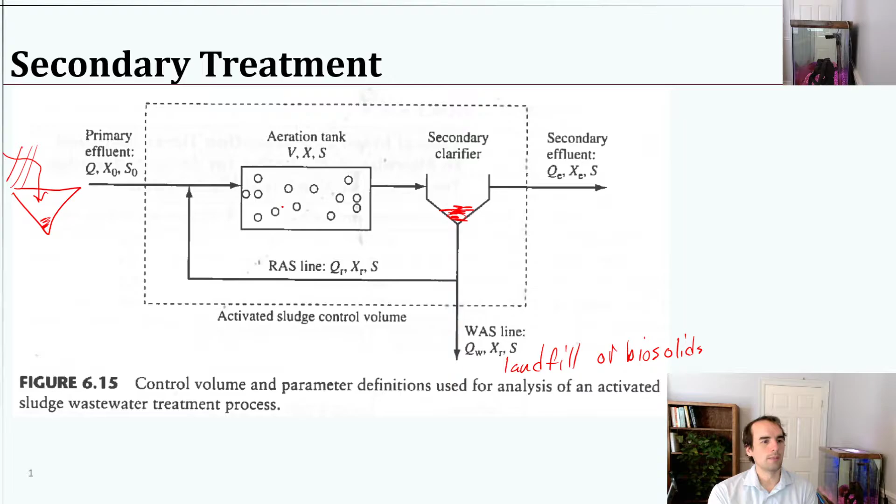So some terminology: a waste activated sludge, or WAS. This is essentially the slurry, the semi-solid stuff, just the junk. If you look into a wastewater treatment plant in one of these, it'll just look like that sludge. It's liquidy, but it's also just muddy looking consistency. It's just a slurry of microbes, the waste, and all of the bubbles that are used to aerate it.

Typically, we'll just simply use air for aeration. You could inject oxygen directly, and that would give the microbes even a bit of a better boost, but it's typically expensive, more so than it's worth to actually get pure oxygen.

So in addition to aeration, one thing that adding all of these bubbles is going to do is it's going to mix the tank. So if we think about the bubbles coming up, as they come up, they're going to be doing lots of mixing. And so when we consider this waste activated sludge system, we want to think of it as a CSTR, because we have a big tank, got lots of bubbles coming through, and it's essentially mixing the system pretty well.

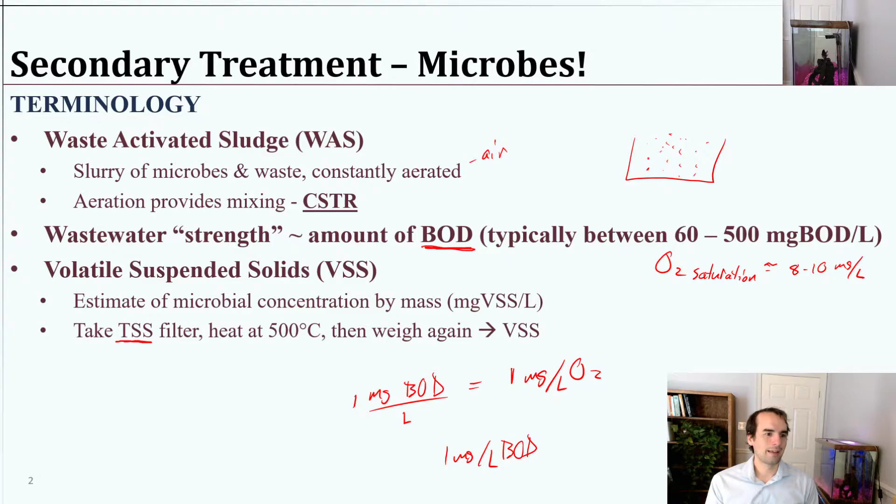That's very handy because we don't know every type of microbe that's in there, and we don't need to. We want an estimate that we can use without concern as to what type of bacteria it is. We don't want to have to hand count them, looking through a microscope or growing them on some petri dish. That has problems itself because not all microbes grow on petri dishes. So this is just a really convenient, simple way to get an estimate of how much microbes we have.

Okay, so thinking about what are the typical treatment outcomes we achieve, we very often have 95 to 98% of BOD removed. So let's take the 95%. And then a low strength wastewater with 60 milligrams per liter of BOD, we can multiply that by 0.05. So we have just 5% of that remaining. So 5% of 100 is just 5. 5% of 50 then is, excuse me, 2.5 is what I meant.

This is probably something like 2.7 or something, right? 2.7, not 0.27. And you could do the calculation for me if you wanted. It's somewhere around there, plus or minus some. Maybe it's 3. But essentially, that gave us a pretty good reduction, right? That means that if we remove 95%, we only have a little bit remaining. But if we had 500, then we're still at something like 27 milligrams per liter of BOD. I guess I might as well be thorough about this and get the calculator out. Okay, it's exactly 3.

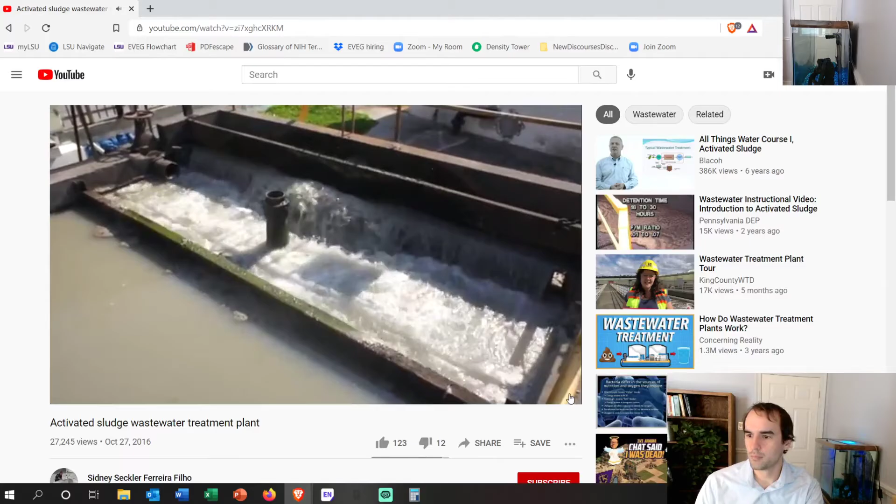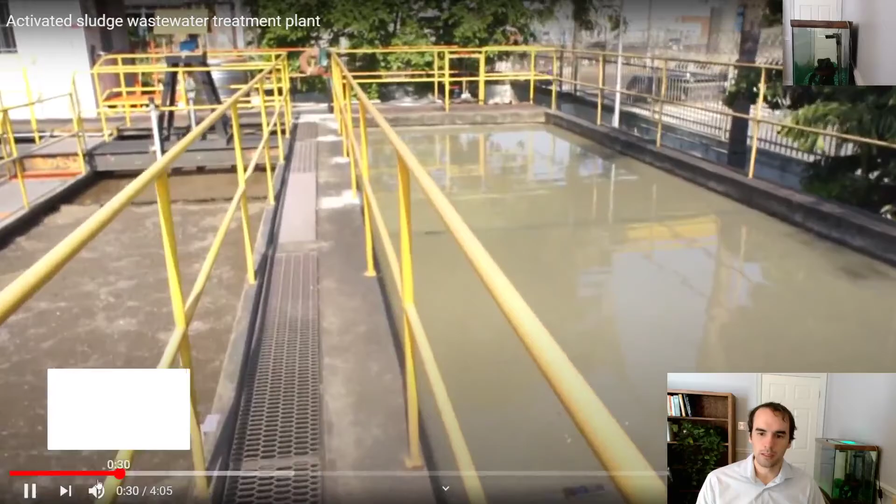So this is just a wastewater treatment plant. It looks like on the right here we've got probably sedimentation happening in a rectangular clarifier, and then on the left over here would be the activated sludge basin with all those bubbles coming out. So on the right, I think that would be either sedimentation, or maybe they're starting it off with the anaerobic process. No, that couldn't make any sense because it goes into air. So that's very likely a sedimentation basin right there.

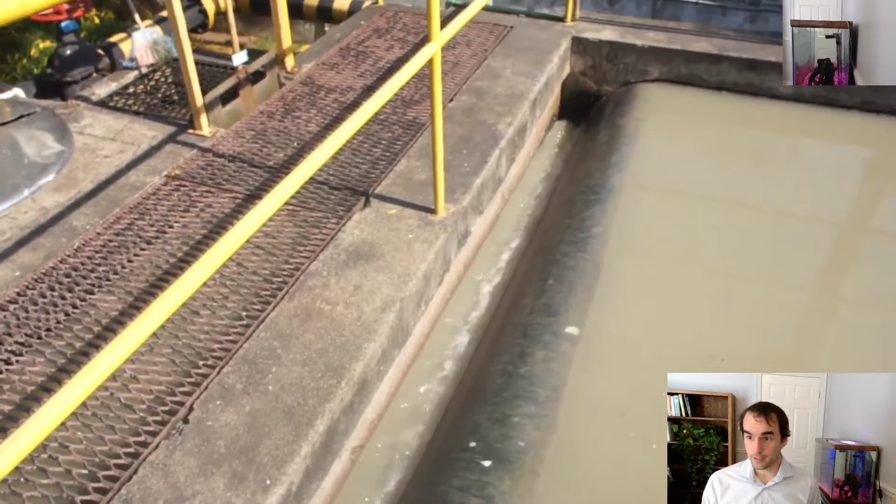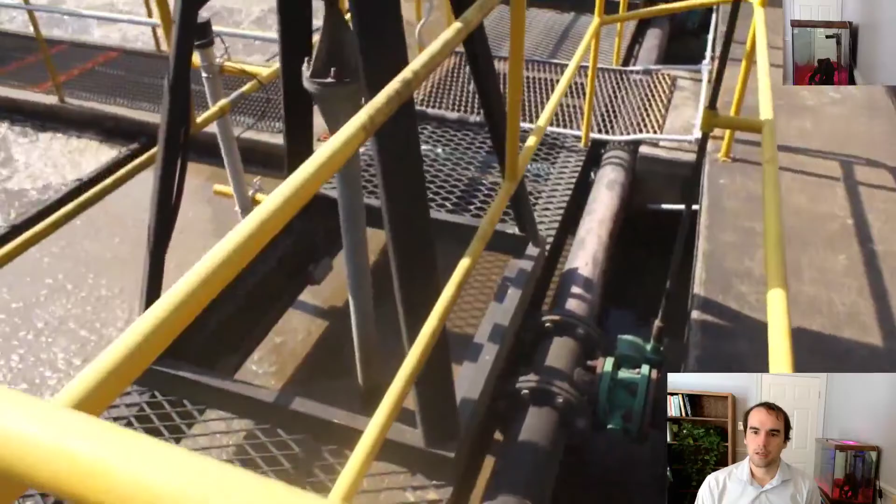It's a rectangular one. Then they're taking that water and feeding it back through the channels into this activated sludge chamber, or probably the multiple ones. And then it's slowly moving through these chambers, providing lots of air as we see. And you can kind of see the sludge-like appearance of it all.

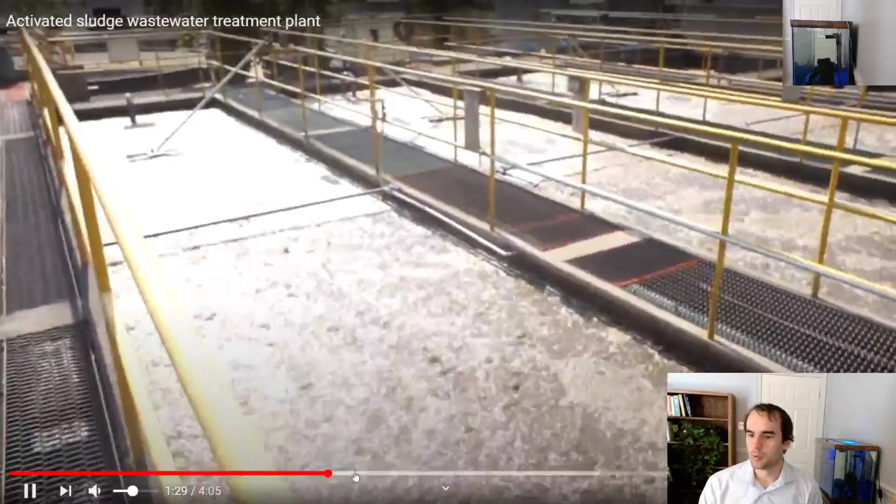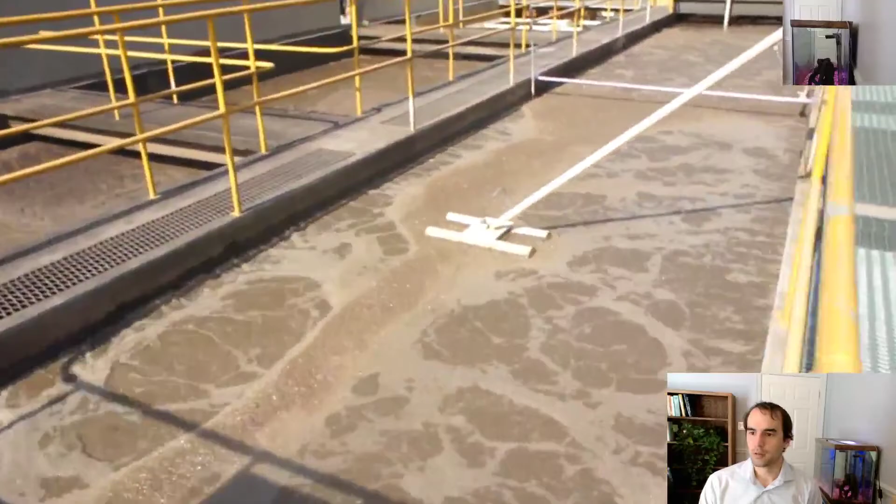So this person is just kind of walking through. Skip through a little bit. It looks kind of like the water is moving pretty quickly, but I think that's mostly the effect of the bubbles making it kind of look that way. Of course, these are going to be designed with specific retention times involved.

Now, one thing I'll note, if it was not already obvious, you really do not want to fall in there, which is why they have all these nice railings. I don't even need to say that, but you especially don't want to fall into it because all of these bubbles will mean that you have less buoyancy, which means you will sink and not be able to swim. So if you fell in there, you're going to be partially buoyant, but not buoyant enough to swim because of all the bubbles.

You're going to have to walk to the nearest ladder, and in each of these there are ladders, because it's probably pretty deep too. And then climb your way out of the wastewater system. So it's actually quite a hazard that you might not think about. So yeah, don't fall into the wastewater treatment.

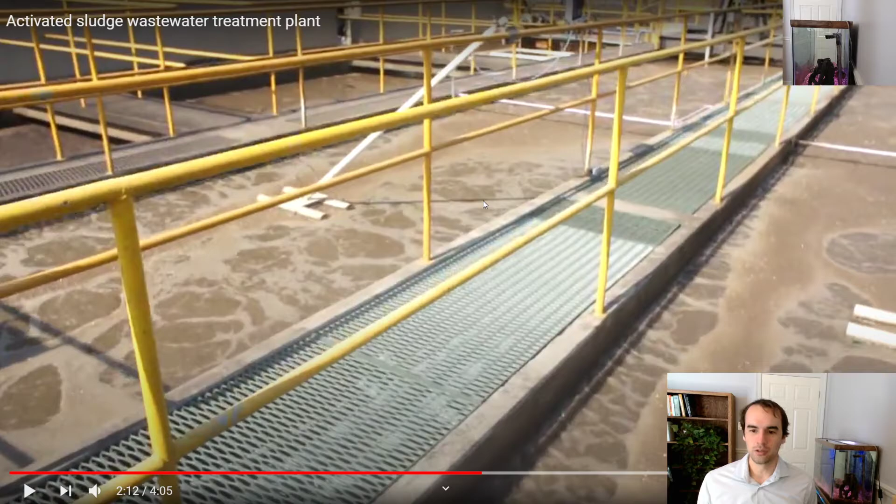That's actually also why if you ever happen to be in a situation where you're on a boat and it's capsizing and sinking, you want to get as far away from that area as you can if you're swimming, because there's going to be lots and lots of bubbles coming up from it sinking. And if you're on a ship, likewise, you want to stay away from it, because you could potentially sink a vessel or yourself have difficulty swimming, given all those bubbles creating a much less buoyant liquid where you're trying to float or swim. So that's kind of scary.

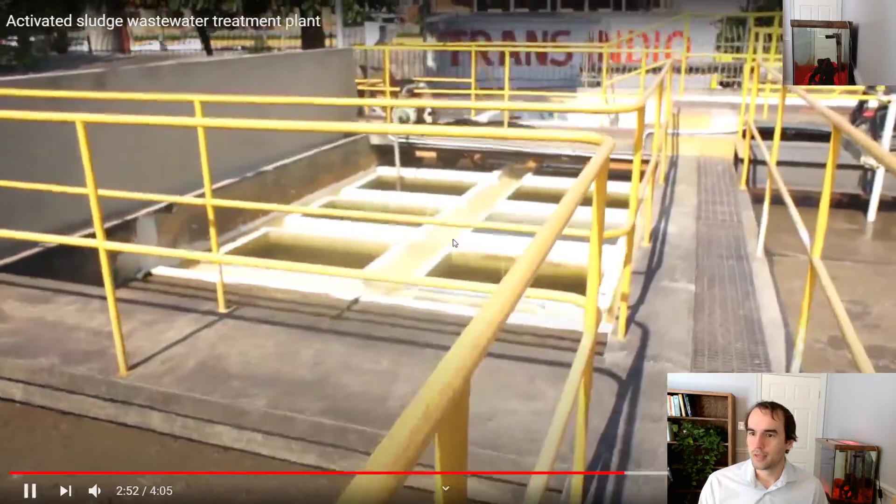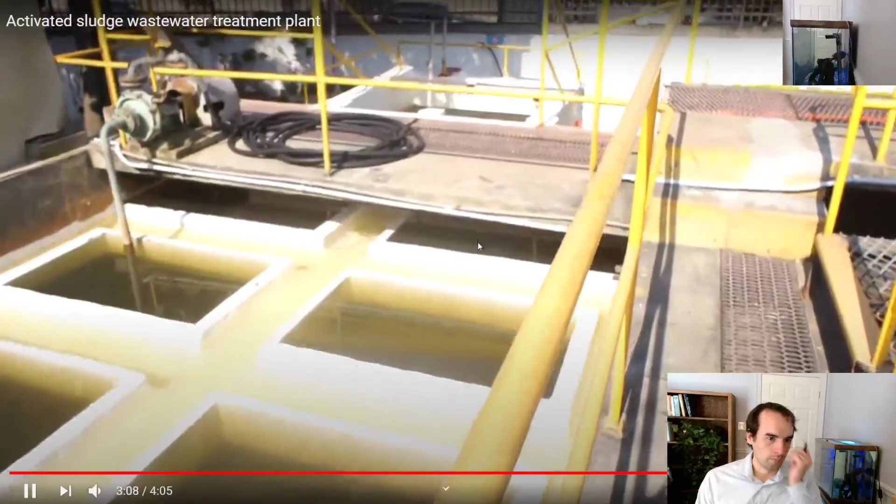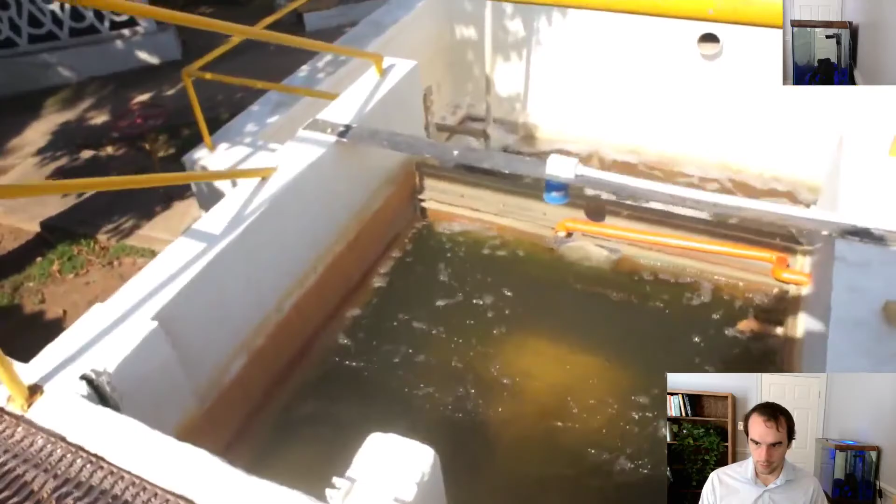So they continue walking through this, and over here we see, not sure what chambers these are. This might be some sort of disinfectant contactor chamber, although I don't think it would be that, given that it's open to the sunlight. And then their effluent coming out here. So perhaps that might be a clarifier that's mostly underground. But then you can see the water coming out. Still has a bit of color, but it certainly will be higher quality than it was a moment ago.

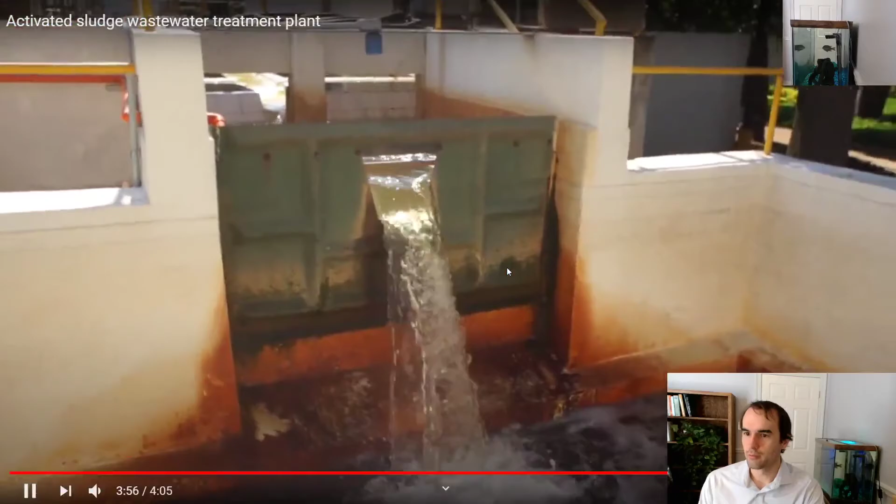All right. And I think that's about it to just show kind of what it looks like from the other side there. So yeah, that's a good depiction of activated sludge there for you. And we'll come back to our PowerPoint. Okay, so moral of the story, don't fall into the activated sludge basin.

Okay, so we want to know something about how to model, predict, understand the growth of microbes and how that relates to the amount of this waste substance we have.

And I've got a sneeze coming, and I do apologize. Maybe I'll be able to mute myself in time. Maybe. Hang on.

Okay. No sneeze yet, but might be coming.

So in terms of the growth of microbes, we can use a term to understand the growth that is called the Monod equation. And this gives us a value for this parameter here, mu. And if you look at this value, this is a rate constant. So what we're looking at here is a growth rate that we're interested in, the growth of microbes, and that is the growth rate constant.

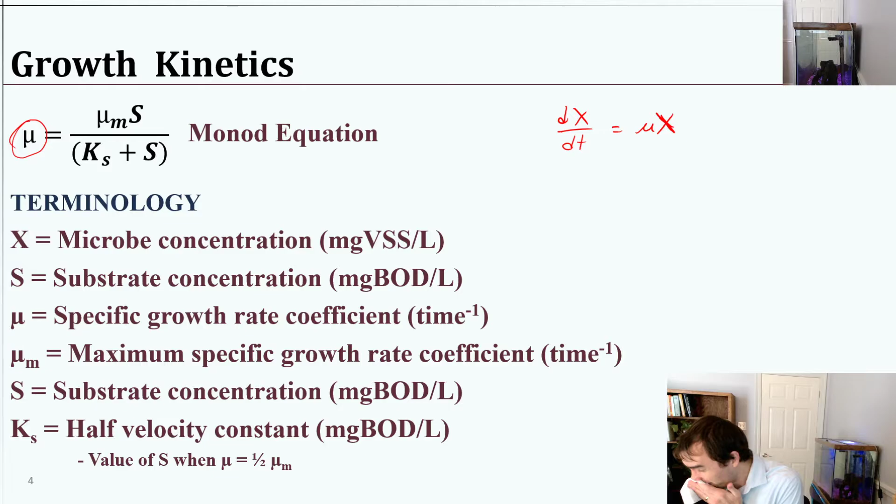Okay, sorry about that. So when we're taking a look at this growth equation, the simple form is dx/dt equals mu x. And we see it's a growth equation. We've done a lot of decay equations, so make sure you're noticing here that this is going to be growth. That means if we have a CSTR and a growth equation, this is going to look different than most of our previous work with decay equations.

So we're defining this rate constant. We've defined different k values before, right? So we have mu this time. This is essentially our k. We've used lots of different k's. So in this case, we're defining mu, or the rate constant, in a particular way, just like we did when we were looking at flocculation, for example. We had an elaborate equation to solve for K. This time we have an equation to solve for mu that's going to depend on how much substrate we have. That's the BOD, or the food.

So you see here that we've defined S as the substrate concentration in milligrams BOD per liter. That's how much food the microbes have to use. It's going to depend on that here and here. It's also going to depend on this mu max, the maximum specific growth rate coefficient. So this is like a rate constant, except this is the rate constant when the microbes have the absolute ideal conditions. They have as much food as they could ever possibly want, and they're not limited by anything. This is just the very fastest they can possibly grow. So that maximum specific growth rate coefficient.

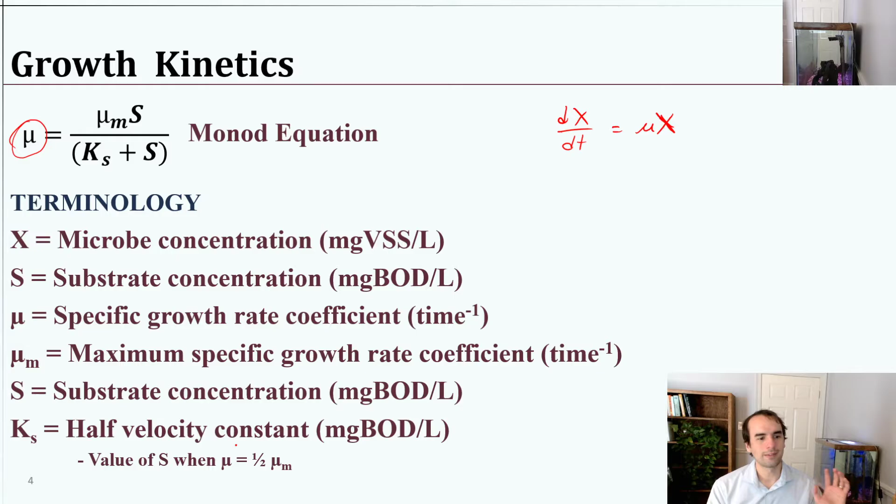So that times the amount of food divided by, and here's two parameters. One is the amount of food. The other is what we call a half velocity constant. This is essentially the amount of food where the microbes are halfway to their maximum happiness. So this is the value of S. So KS here, this is uppercase K, by the way. There are a few Ks, and I apologize. I'm just sticking with the book's nomenclature. So the capital K with the subscript S is what we're talking about here. This capital KS, that's half velocity constant. This is the amount of food where the growth rate constant is equal to half of the maximum growth rate. So the microbes are basically halfway there, halfway to their ideal condition.

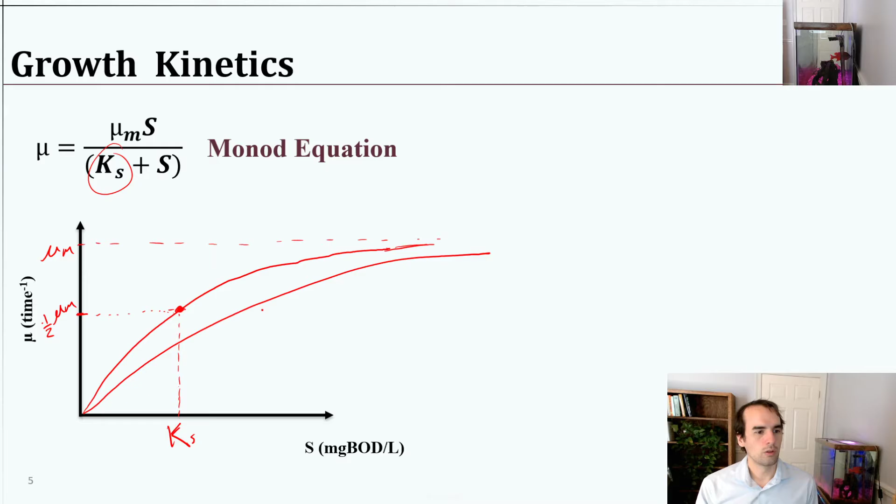And this parameter then shows us something about the shape, right? Maybe sometimes it would look like this, or like this. And so by providing that KS, we can know something about how long it takes before we reach that halfway mark. So it's a simple way to account for those types of changes.

Okay, so let's take a look at what happens in reality when we put microbes in a tank, give them air, give them water, give them food, and we stir and let them have a party, right? What's going to happen is we're going to grow more and more cells over time, right? If we look at how many cells there are, when we first put them in and first give them the food and everything, there is a bit of a lag phase before they start growing.

They're just kind of acclimating to their new environment, detecting that there is food nearby, and then starting to activate, starting to consume, and then starting to reproduce. So for E. coli, for example, this takes maybe 2 or 3 hours. If you had some frozen E. coli and then put it in a nice warm area to grow, it'll take a couple hours before it really starts taking off.

You can actually think about food safety in this manner too, right? If you have food and it's been kept in the refrigerator, presumably it's safe, and you don't have to worry too much about microbes growing. But let's say you make some sort of a, I don't know, potato salad or something, and you have maybe some eggs in it or something. Lots of nice nutrients. There's probably some bacteria if it hasn't been cooked all the way. Even if it has and maybe you've opened it before, there's probably some bacteria from somewhere.

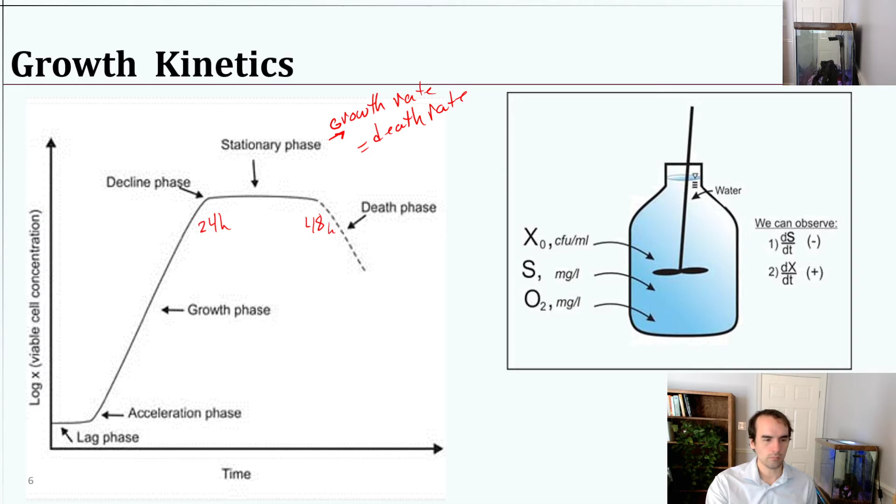So if we were to map food on another axis here, the substrate would probably be declining kind of like this. Something like that that is a little bit of an inverse of the growth. So that mathematical balance is something that we're very interested in looking at and modeling. Okay, so how do we do that? Well, let's get the growth kinetics in play here.

We have the Monod equation that we talked about, so that's our definition of the growth rate constant. The growth rate itself, as I mentioned, is going to be here, dx/dt equals mu x. We can say that the rate of growth then, r sub g, is mu x, and we can substitute all of that stuff in for mu and say that our x times mu is x times mu max times S divided by Ks plus S.

Now, I want to highlight something here. This mu max and this Ks, these can be known constants for a specific type of microbe, for a given microbe. So you could know something about your bacteria or your mixture of bacteria, about how they grow, and with that knowledge, then the only thing that this growth rate is going to depend on is how much food you're giving them, right?

So these two parameters here, if you have that knowledge already, and you could probably do a pretty simple experiment to find it, then you can actually know how much growth you're going to get given how much food you give the bacteria. So that's very useful.

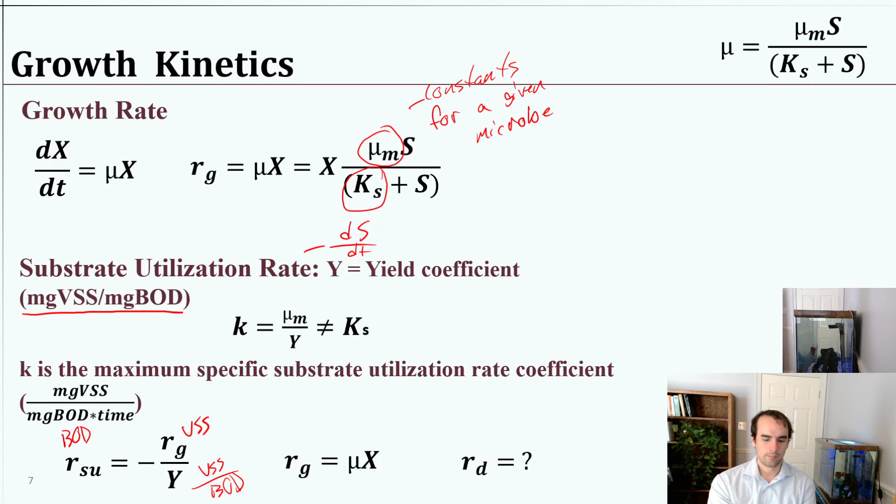Okay, so that answers our growth rate and then how our substrate utilization occurs in light of the growth rate. Now the last portion of the equation would be the death and decay rate. So here we have, again, the graph that we were looking at, and we know there's growth, there's death, and in consequence, there is also substrate utilization.

So the death and decay rate we can define, so RD is defined as negative KD X. So again, a third K here that the book has given us. This one is a lowercase with a subscript D. This is just a rate constant for the death rate. So keep in mind, there are now 3 different parameters that involve the letter K. 2 of them are lowercase with subscripts, and 1 of them is the uppercase.

So KD is death and decay rate constant, again, per time units. And with that, it's pretty straightforward. We just need to know something about the death rate constant, and it's going to be first order in relationship to how much bacteria we have.

So with all of that, then we want to define an overall net growth rate. And this net growth rate, we can call it R prime of G. That net growth rate will be the net change in X, accounting for both the growth and the death. So the net growth is going to be equal to the growth plus the death. And of course, this term will be negative, and so those will balance. We can also define, remember, the growth in terms of substrate utilization.

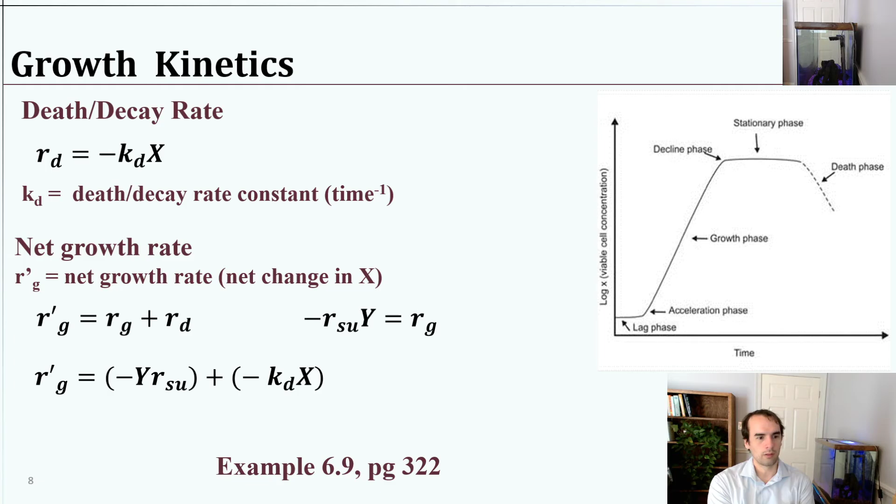So we have a net growth rate here, R prime G. We can define it, if we do that substitution, as negative Y times R of substrate utilization plus the negative KD X. Okay, so we're going to tie all of this together with an example. This is 6.9 on page 322. We're going to do a kind of a sequence of examples.

First, we're going to start with a system where we have the biological reactor, but no clarifier. So we just have something coming in, something going out, and the biological reaction. Later, we will also include the recycle. So next lecture, we'll get into recycle and how that portion works. Right now, we're going to do just this reactor itself.

Now, this is going to be a little more complicated than any of the problems we've done in the past in terms of the rate equations and the mass balances, because we are going to end up needing two different mass balances to work the problem.

So example 6.9 here, with an associated table of common parameters. It gives common parameters for K, for mu max, for Ks, for Y, and Kd in their units. We're also going to use default values. This problem mentions in the next step to assume the default value. So we're going to use these values here.

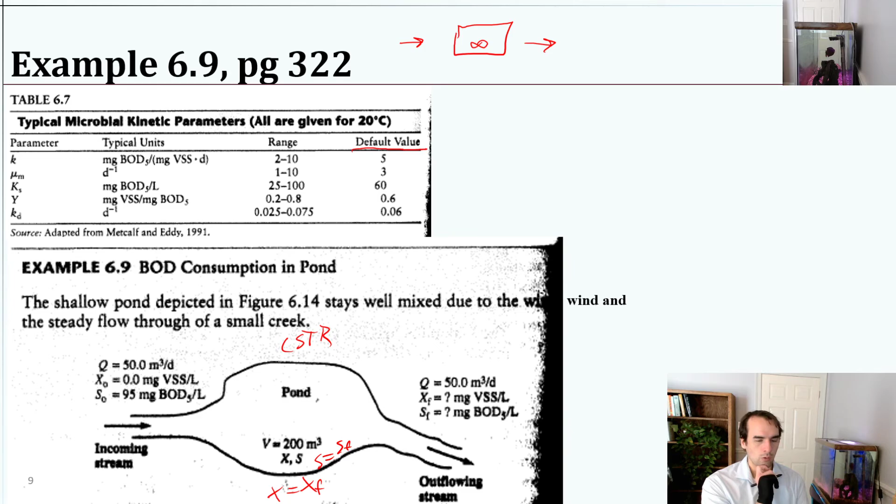So if we were to look on the next page, it says the microbes in the pond consume the inflowing biodegradable organic matter according to typical kinetics. If that's the case, then determine A, the BOD leaving the pond. So this is going to be SF.

B, the biodegradable organic matter removal efficiency of the pond. This is just going to be what we started with minus what we ended with, divided by what we started with, times 100%. Should be pretty simple once we've got A. And C, the concentration of volatile suspended solids leaving the pond. So XF. So those are the three things we need to solve for here.

And I'll go ahead and give you the start of the solution. It says the pond can be modeled as a steady state CSTR because it is well mixed. And we'll assume the stream flow has been at a steady flow rate and composition for a long period of time.

So part A, it suggests that first you want to set up a mass balance on the microbial concentration, microbial mass, using the pond as a control volume, in the variables in figure 6.14. Based on those things, we can write a mass balance: 0, since it's steady state, equals Q X naught, what's coming in for the microbes, minus what's leaving, Q X final, plus the net growth in that volume.

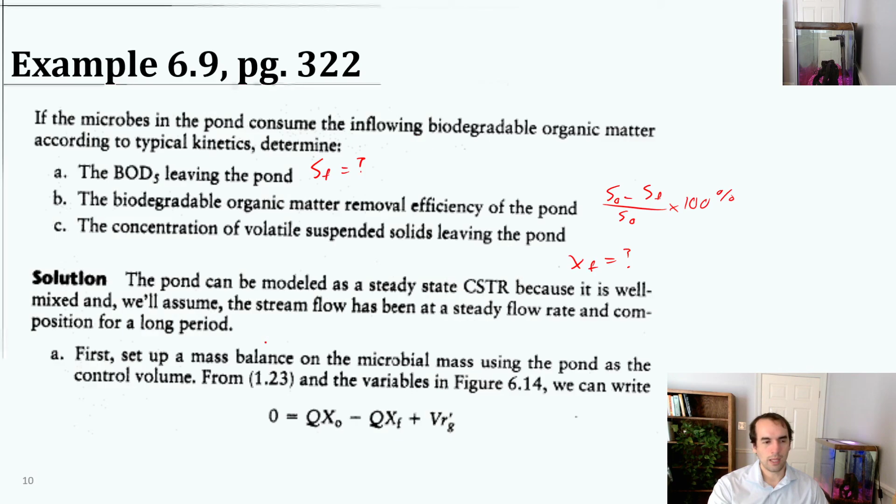We know how much substrate's coming in. And so given that, we have some amount of microbes that will be growing, and essentially this term will go to 0. And then we're just left with how many microbes are leaving compared to how many are growing. And it will turn out that we can get the microbe concentration value to cancel and be left with just an equation for S in terms of the known parameters.

It's a little counterintuitive that way, but we can do that, and then we can do a mass balance on substrate for the other one to get an equation. Given that we now know the substrate leaving the pond, we can solve for X, since we have the known S. So it's kind of an interesting situation.

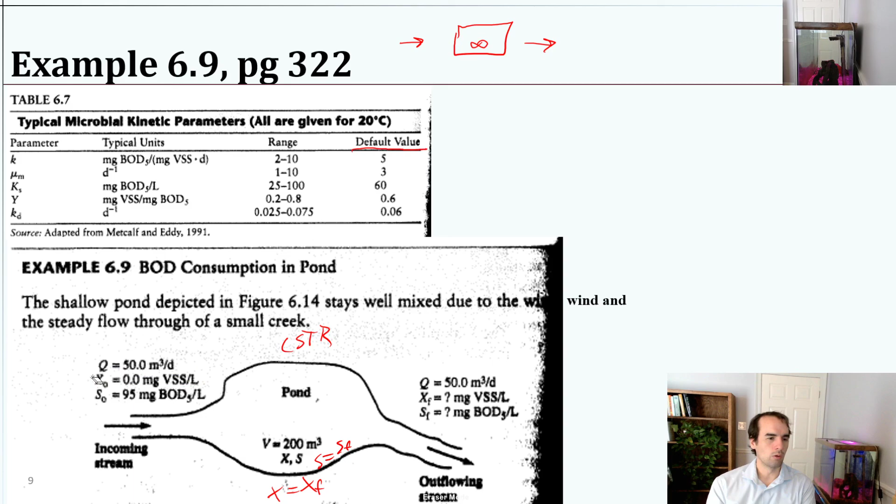This really only applies to the case where we have no recycle. So there's no recycle of microbes, meaning X naught is 0. So that's an important component of the mass balance and the way this is going to work when we solve it in the situation here.

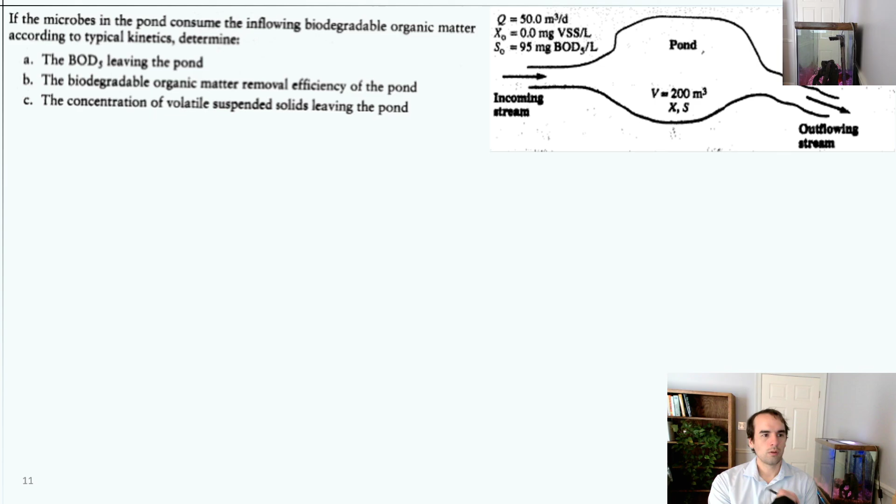Okay, so we've only got a few minutes left. What I'm going to say is practice this on your own. Work towards coming up with a solution on your end. And then next time we get together next week, we'll begin here and we'll go over this problem.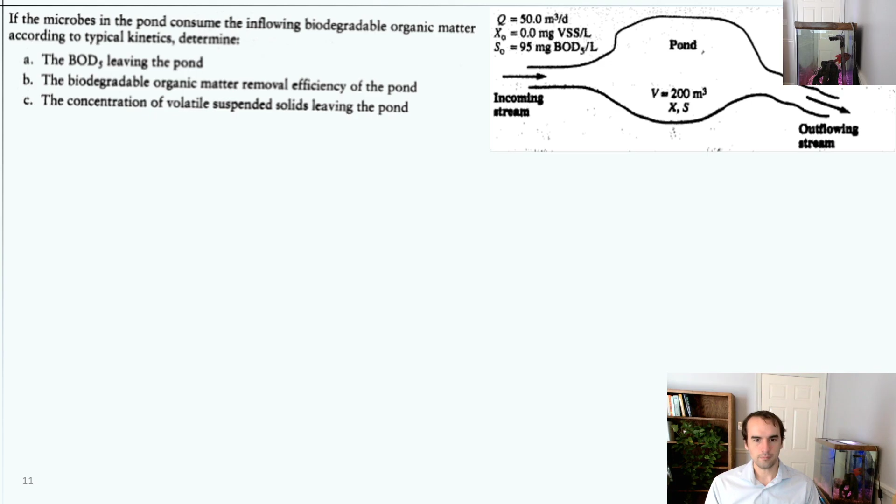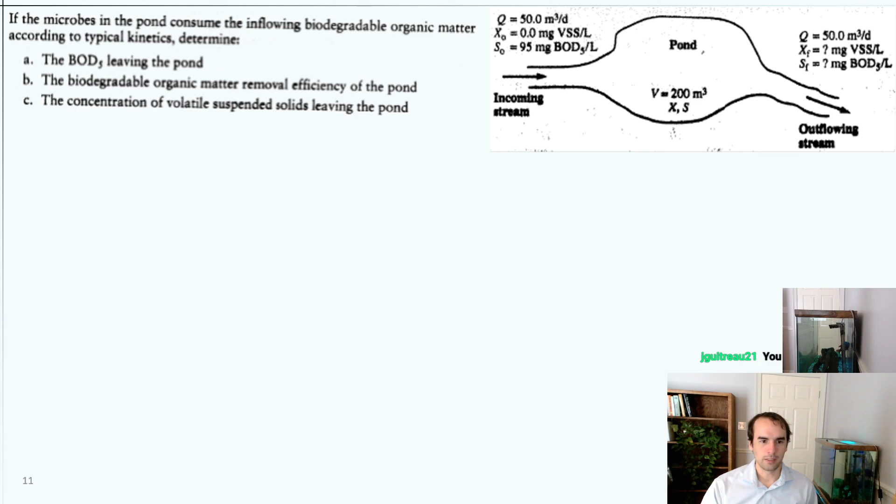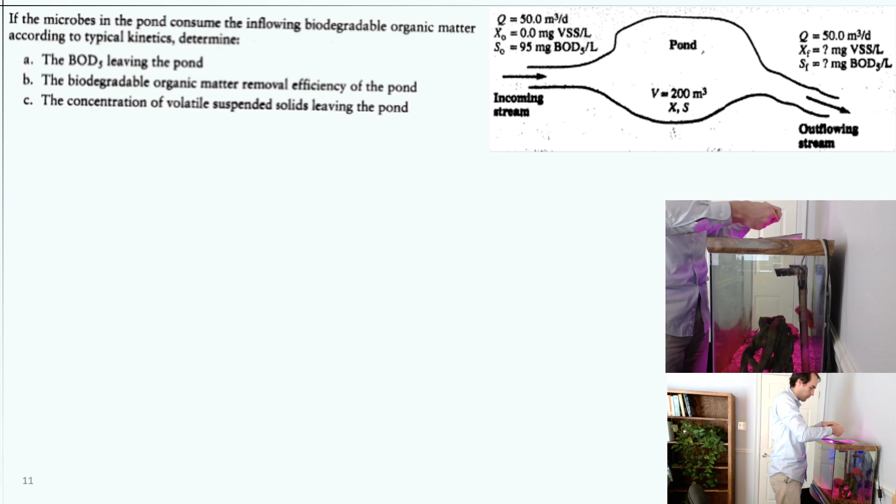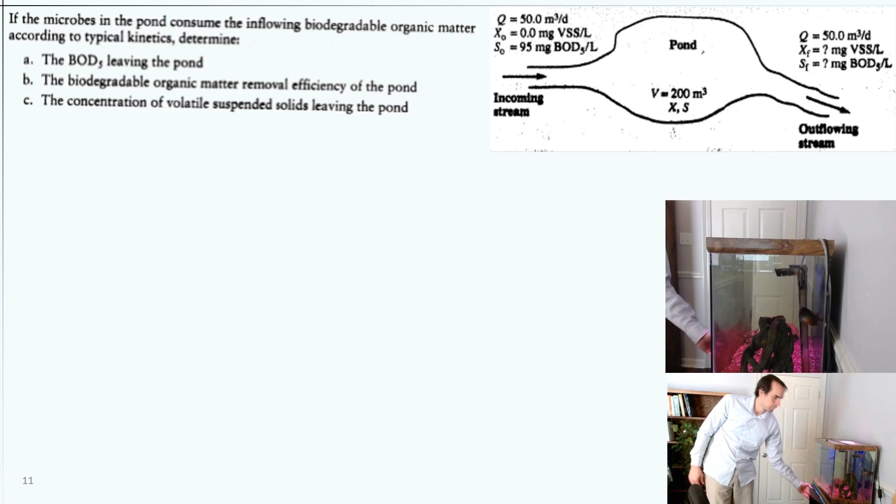And in the meantime, I think my fish needs some food. Oh, thank you. So we'll go ahead and feed the fish. Give you a moment for any questions. The fish has become less camera shy during the course of the semester.